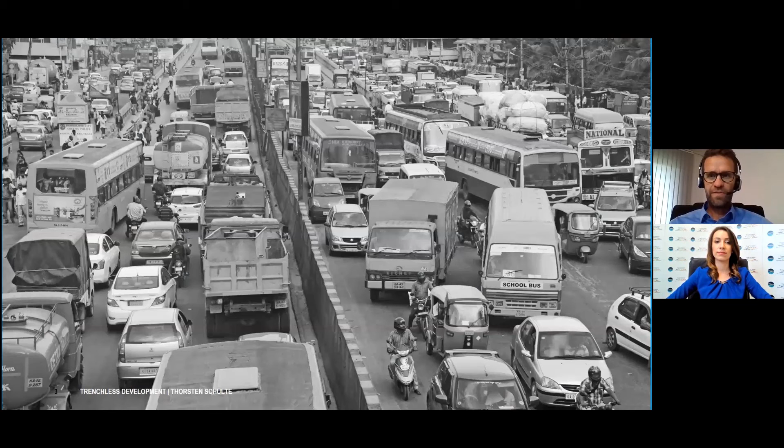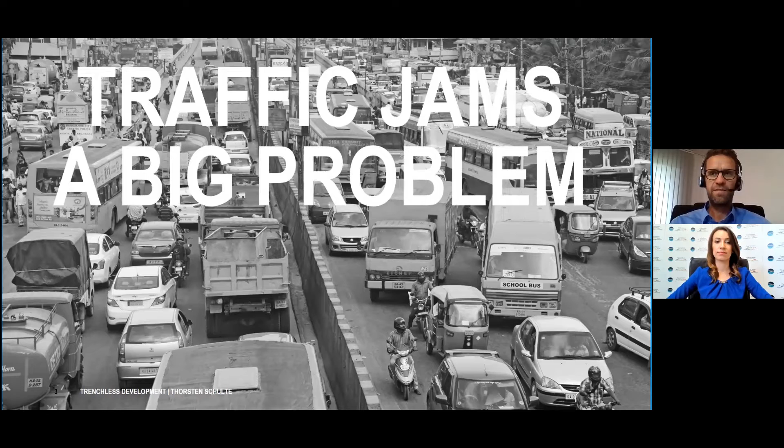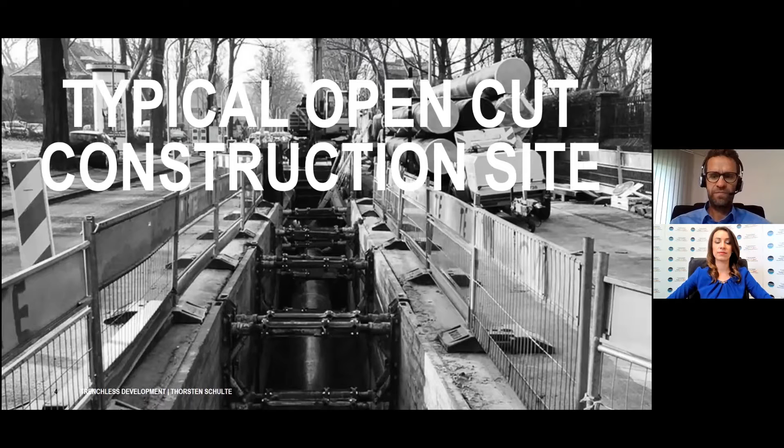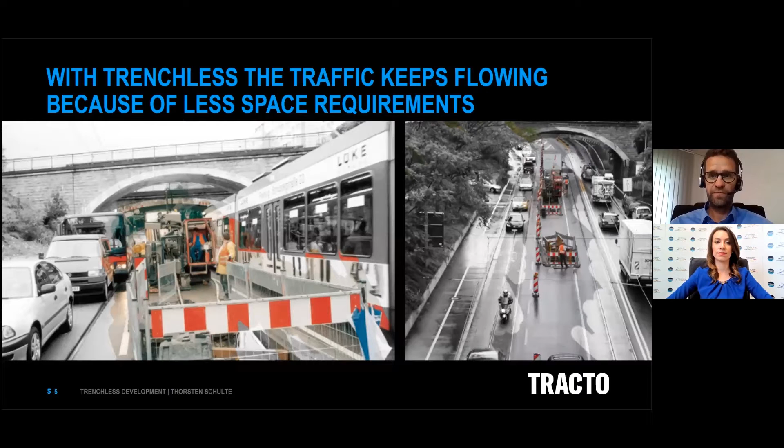First of all, everybody knows this situation. Traffic jams today are a big problem. As you can see on this picture, it's the city of Bangalore in India, and this city has the most traffic jams worldwide. Here you see a typical open-cut construction site. That kind of construction site definitely leads to significant traffic obstructions. With trenchless, the traffic keeps flowing because of less space requirements.

On this picture, here we have a technical application, I think. That's right. On this picture, we see a pit-launched mini HDD system. And here, trenchless definitely means also minimal impact on surfaces. Normally, for trenchless, you only need a little starting pit and a little target pit, and that's all.

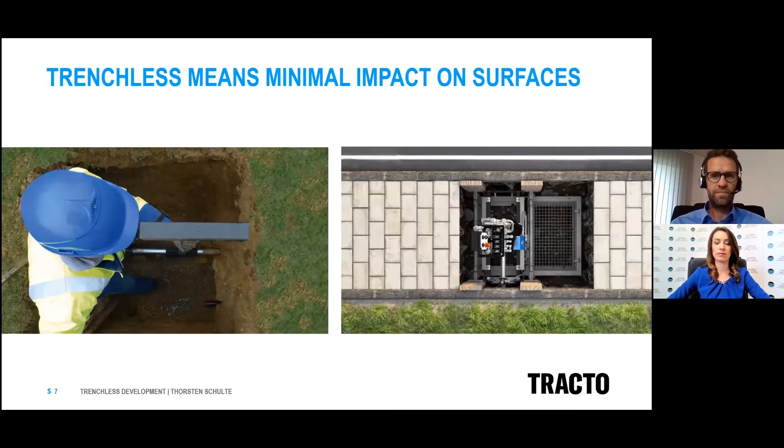Two other examples. On the left side, you see a picture of a starting pit for a soil displacement hammer. And on the right side, you see a picture where a mini HDD system is installed within the sidewalk. So less space is required. Another big advantage for trenchless is that we have minimal earth movements.

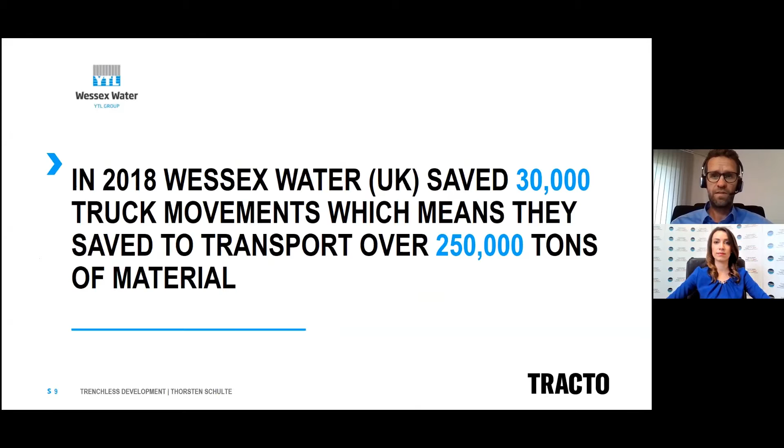Just to give you an example, in 2018, Wessex Water from the UK saved 30,000 truck movements, which means they saved transporting over 250,000 tons of materials. It's a large number. Just to get a feeling what that means, on the left side, you see the number of vehicles you need for an open-cut construction site. And on the right side, you see the comparison for a trenchless construction site. This comparison is based on an example job site from the GSTT information number 11.

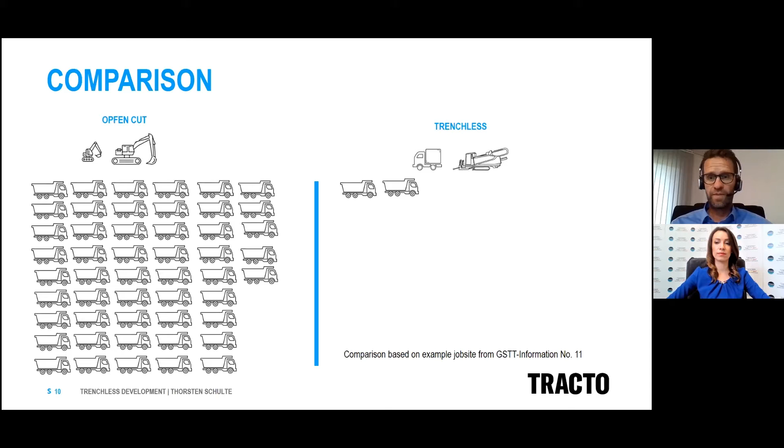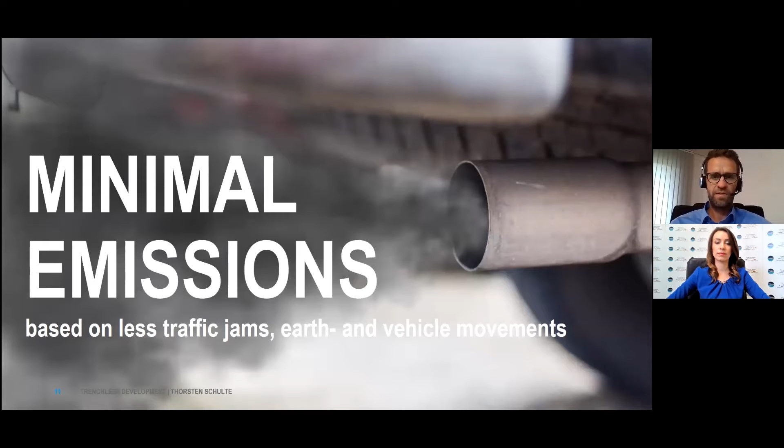The next big advantage definitely is that we will have minimal emissions based on less traffic jams and also on earth and vehicle movements. Minimal emissions, what does that mean for trenchless? With trenchless, you can reduce the CO2 emissions up to 50%. And you can also reduce fine dust up to 100%. And we also have a massive noise reduction.

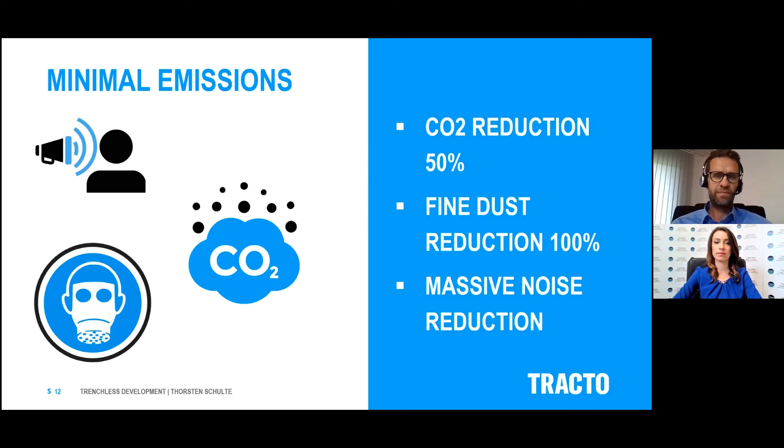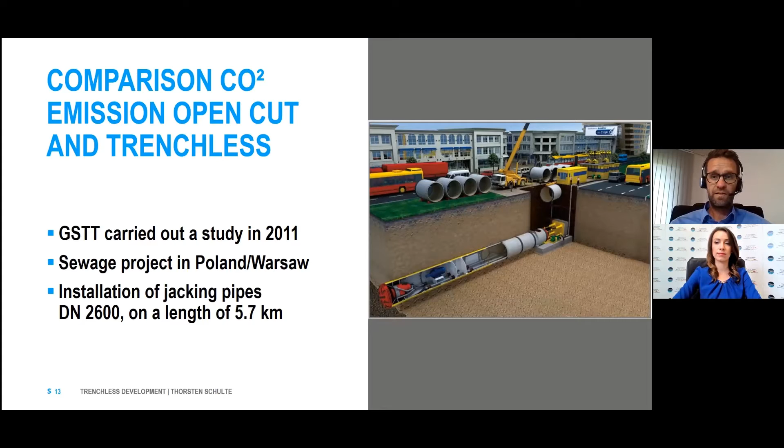In 2011, the GSTT carried out a study in Warsaw, Poland, about a sewage project. Here they installed jacking pipes on a length of 5.7 kilometers with a pipe DN 2600. And here they also did a CO2 comparison between open cut and trenchless. As you can see on this slide, this is the result of the study.

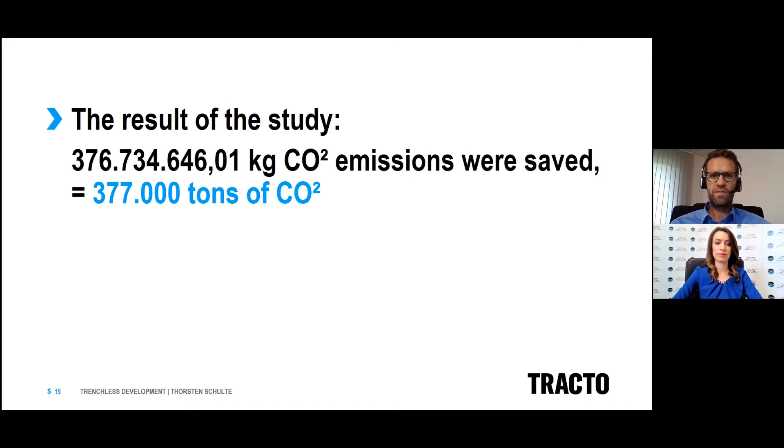And as you can see, we have around 377,000 tons of CO2 emissions saved. To give you a feeling, 377,000 tons is about 45,000 round flights from Berlin to New York, and that for 4 persons.

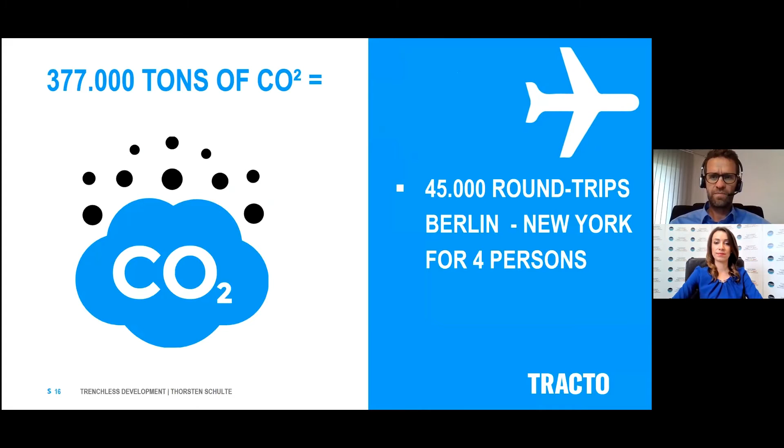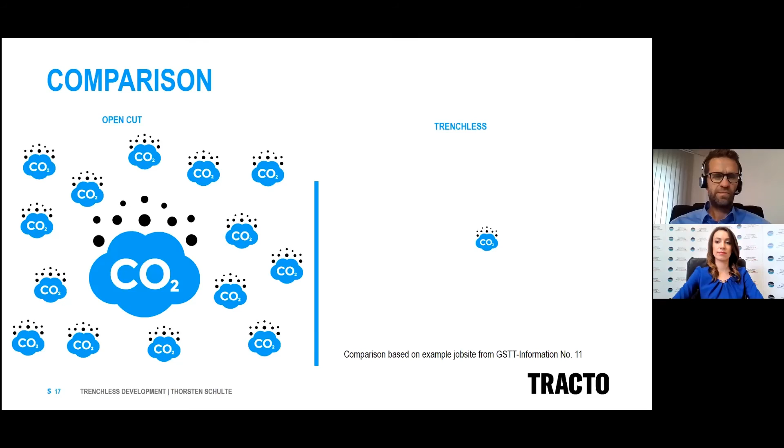Again, based on the example job site from GSTT, you see on the left side the CO2 emissions for open cut, and on the right side the CO2 emissions for trenchless. So Thorsten, I see that there are so many benefits when using trenchless technologies. Are there any other applications that can be served by these innovative techniques?

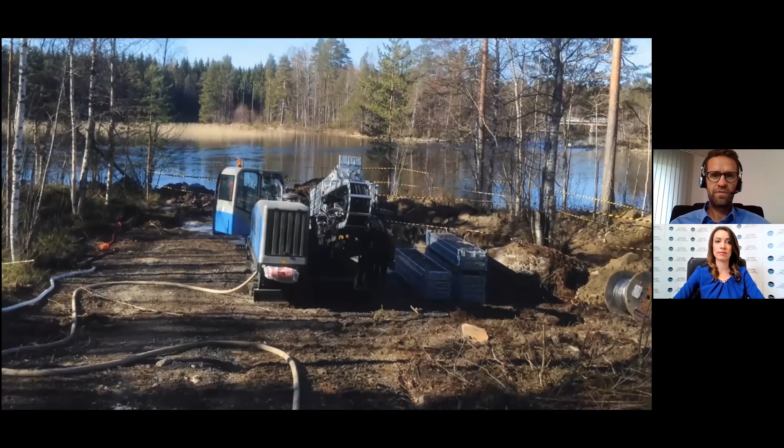And that brings me to the point that trenchless even works in nature reserves. And sometimes using trenchless is the only allowed option to do a job. As you can see on this picture, this is a river crossing. It was done in Finland to install a power cable. And you are right, there are many, many other applications for trenchless.

Just to give you a quick overview, you can use trenchless for fiber optic network installations. You can use trenchless also for the e-mobility sector to connect the charging stations. We have trenchless for sewer pipeline installations, for water pipelines, for the gas networks, for the big transportation pipelines, especially for gas, also for water, and also for oil. Electricity ground cabling, and for district heating and district cooling.

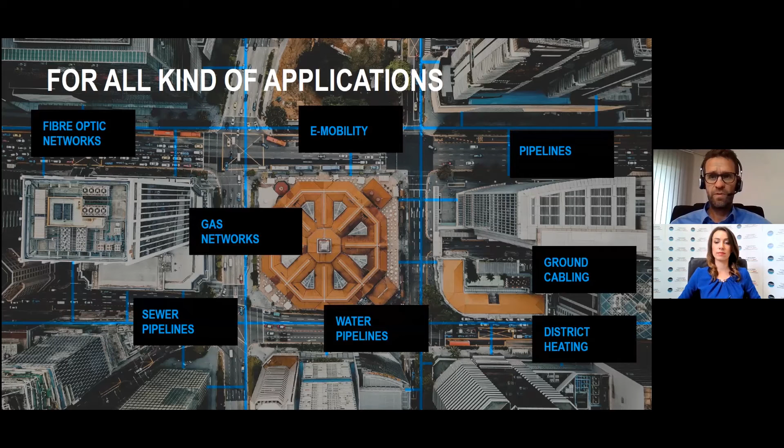So all mentioned advantages are also good for residents. And it's very, very important and helpful to support the idea of smart city concepts for today, because trenchless then leads to very positive urban life quality effects. And if we were to evaluate the natural capital for trenchless technologies, how can we estimate this evaluation?

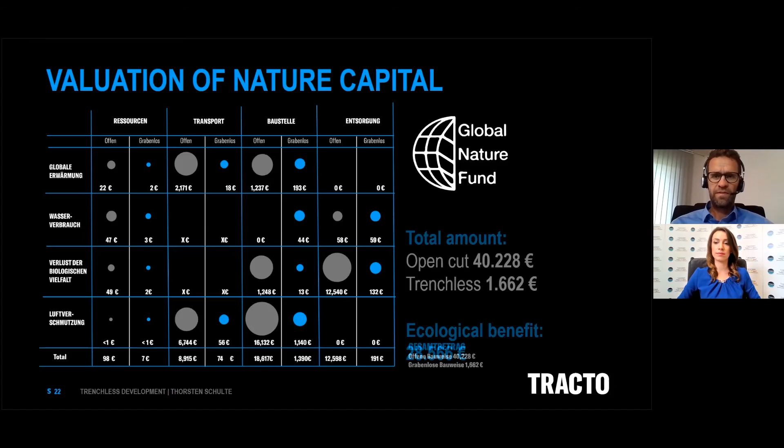A few years ago, the Global Nature Fund did an evaluation of nature capital. And what you can see here on the slide is there have been different aspects evaluated, like resources, transport, job site, disposal, and their impact on different things like global heating, like water consumption, the loss of biodiversity, and also air pollution.

And the result of this evaluation was, when you take a look at the total amounts, for open cut it was 40,000 euros. And for trenchless, it was only around 1,600 euros. So the point is that the total ecological benefit here was about 38,000 euros. So that is also for me a very large number and also a big advantage for trenchless.

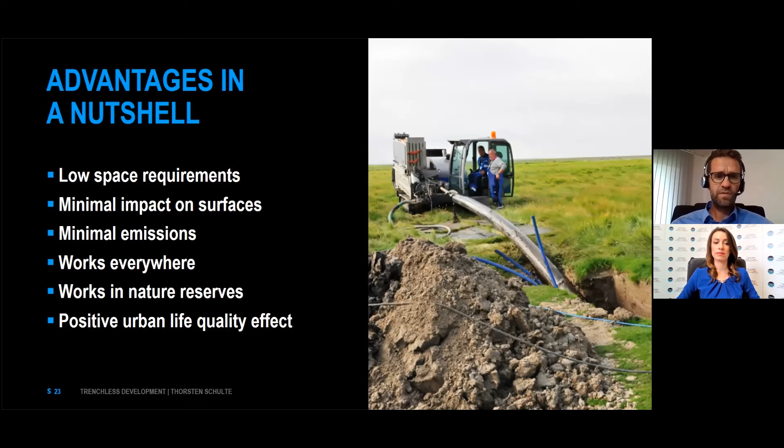So to make a little summary, to talk about all the advantages in a nutshell, trenchless means we definitely have low space requirements. We have a minimal impact on surfaces. We have minimal emissions when using trenchless technologies. Trenchless works everywhere, even in nature reserves. And at the end, that brings us to positive urban life quality effects for the citizen. And at the end, I would say, and this is the hope I have, that in the future, the infrastructure definitely is a trenchless one.

So thank you very much, Maria, for your attention as well. Thank you very much, Thorsten, for this presentation, for evaluating the advantages of trenchless technologies. It's clear that this is the step for a smart city and, as you said, for a better life quality within the cities.